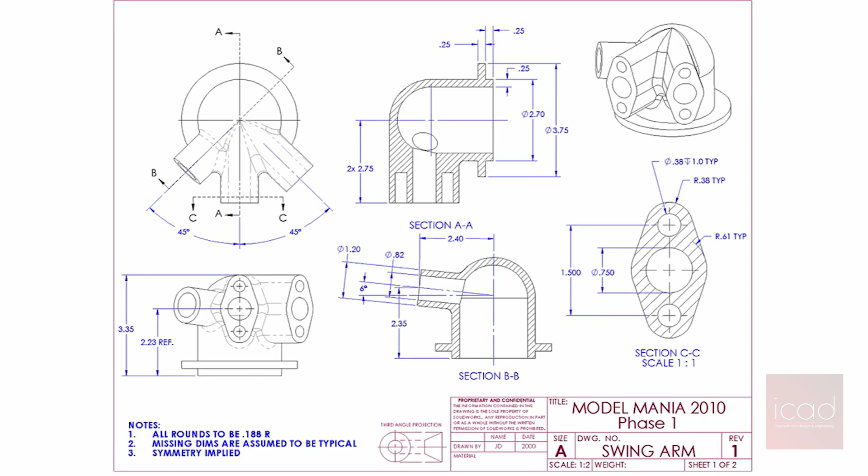In today's tutorial, we will be designing this drawing from Model Mania 2000. This is the phase 1 drawing of Model Mania 2000, held at SOLIDWORKS World 2000. This was the first ever Model Mania drawing, and it's been 25 years since Model Mania started. Model Mania is not just about time, it's also about accuracy. So it's not how fast you design, but how fast and accurately your design matches the given drawing. Let's get started.

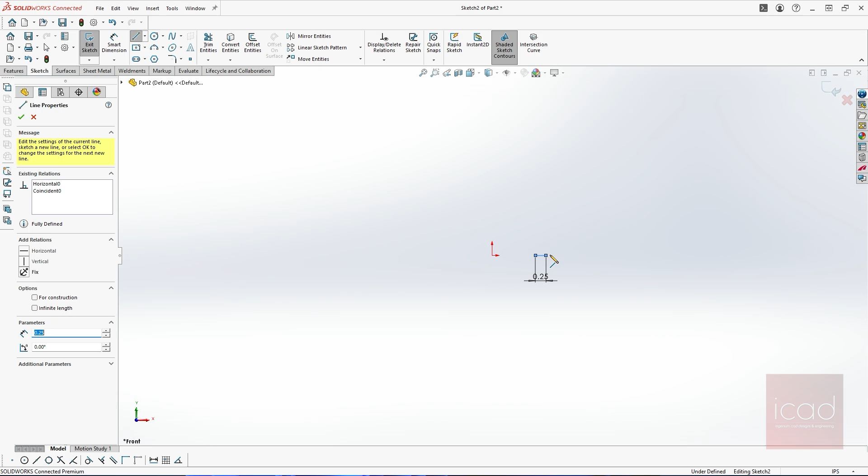For this particular drawing, first I'll take the front plane and sketch the dome part, which has to be revolved. Line, this is 0.25. I'm only giving dimensions of which I know, and the rest I'm just leaving, and I'll give the dimension later. 0.25, this is there.

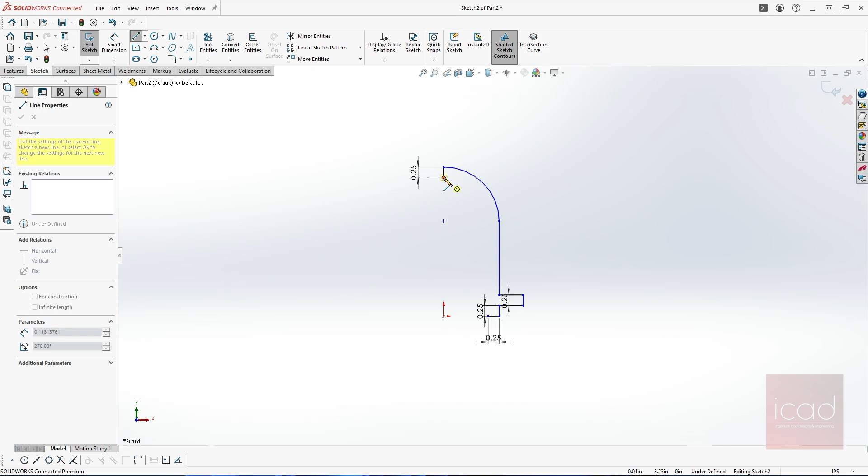It's just a line, and then we have a curve, so I'll just go back to the point. As you can see, there's a yellow circular thing, which means it just changed from line to curve. Again I'll do 0.25 because that's the thickness. Now you can see it's line, but if you go back to the point, you can see the circle, which means now it's not circle anymore, it's just line. And now it will go back to line again. That's how you change from line to arc when you're on a line.

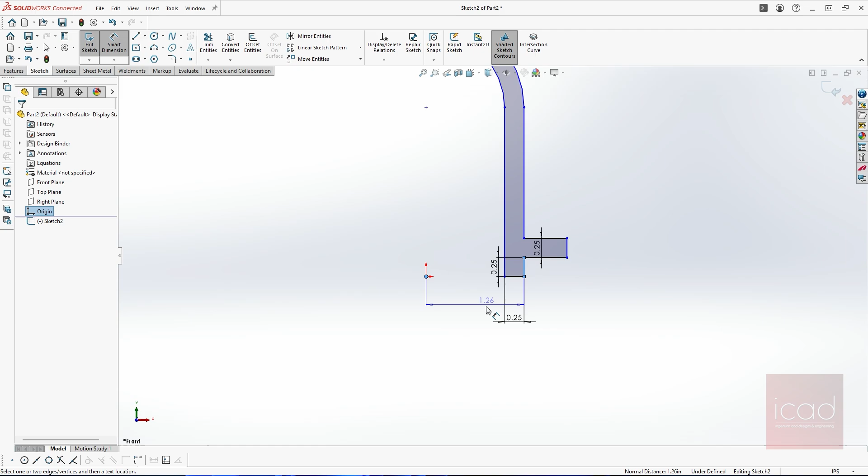I'll take dimensions. In the drawing, we know the outer diameter of this hollow cylindrical dome thing. So since we know the diameter is 2.7, the radius is that divided by 2.

Let's say you have a center line. I'll just take a center line. Right now you have a center line here. And instead of just giving radius, if you have a center line, what you can do is if you stay on one side of the center line, it will just show radius, but if you go to the other side, you can directly give the diameter. It's 2.7.

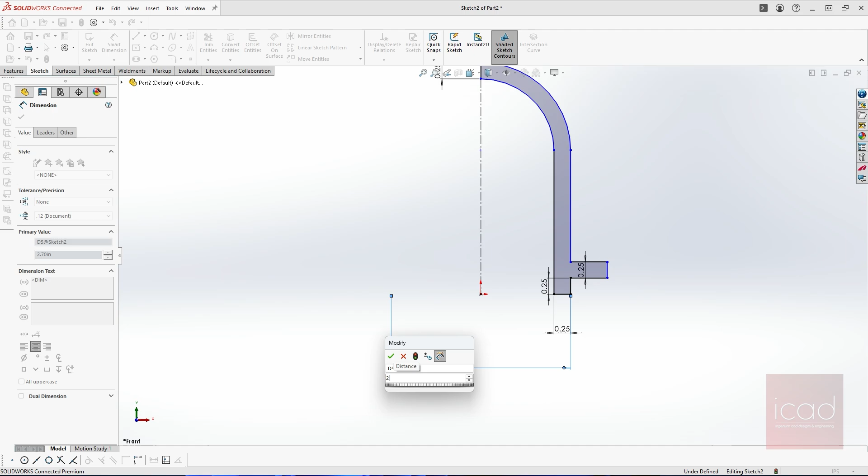We know the diameter of this, which is 3.75. And this line has to be collinear with this, because of uniform thickness, and the inner and outer arcs are concentric. They are already concentric, so we don't have to worry about that. And we know the dimension of this, which is 3.35 inch.

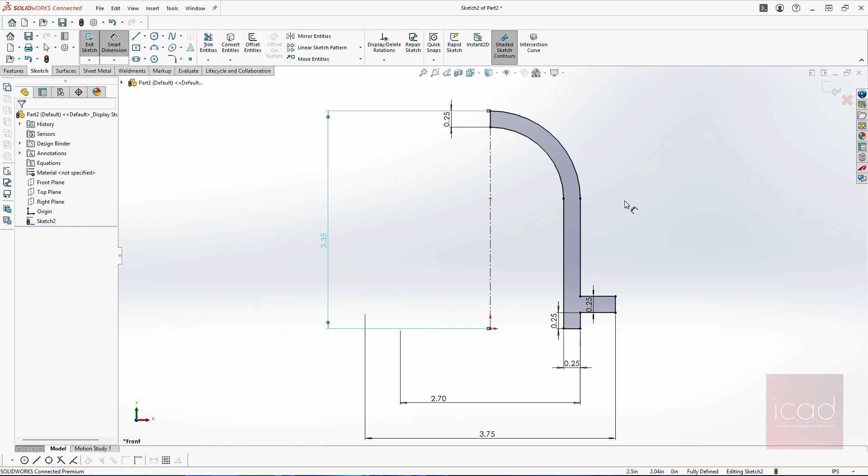Next I will revolve this, revolve base, and done.

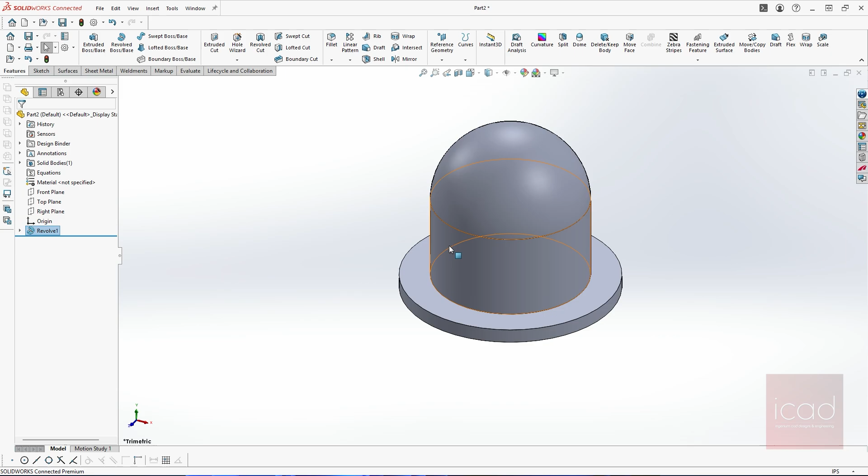The next thing is to design the section C thing, which is extruding from this. To design that, I will design it in the right plane.

I go to right plane, I will draw the center circle of diameter 0.75, and above that there is another circle of diameter 0.38. To make sure this is vertically aligned, and all of these are vertically aligned to the origin itself. The distance from the center distance is 0.75.

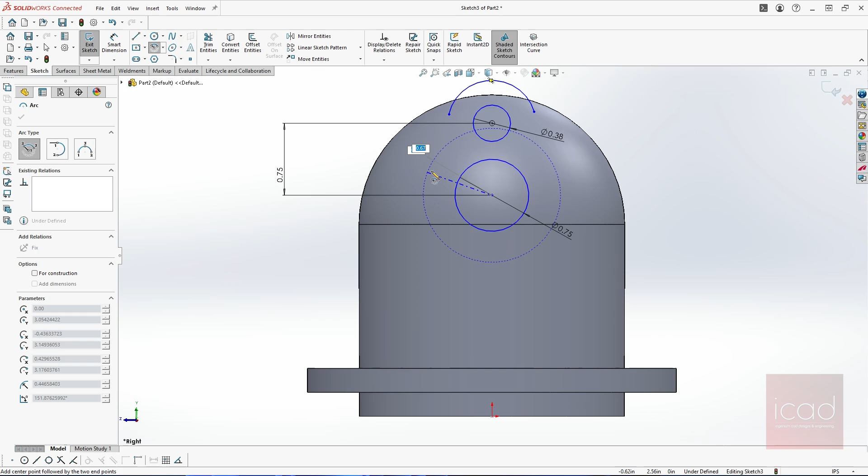Next we'll take arc, center arc, just draw this. Again I'll take center arc and draw. Next I will connect these two arcs with a line.

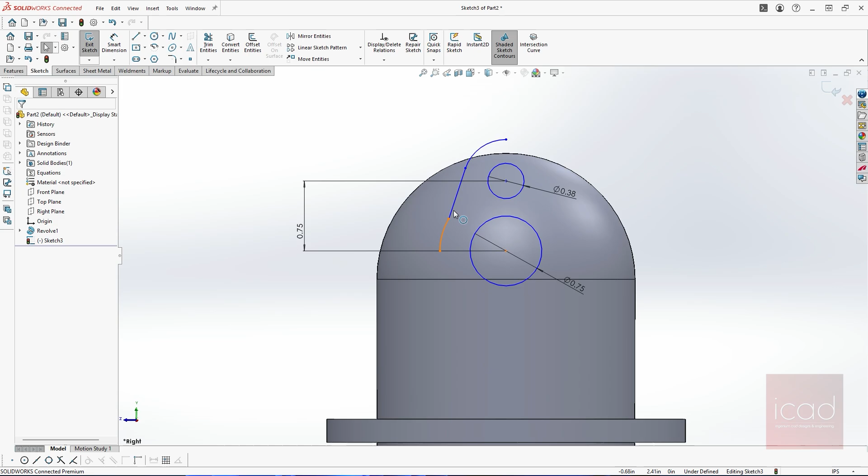Let's make sure it is again vertically aligned. Why am I doing this? Because I'm gonna mirror this later. Instead of creating the whole outer profile, what I'll do is I'll just create 1/4 of it. Since they are all symmetrical, I will just mirror them. Tangential. The radius of this arc is 0.38, and the radius of this arc is 0.61.

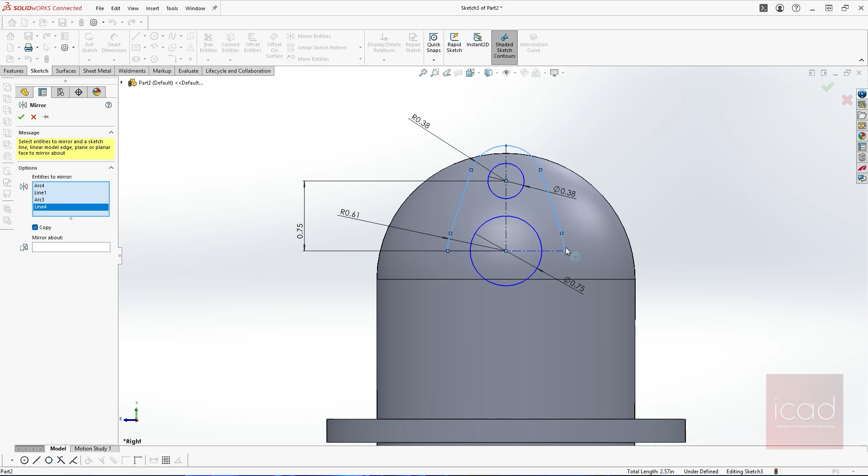I'll take line and check the for construction box, just draw a construction line so that I can mirror it. Go to mirror, select these things, and it should be mirrored with respect to the vertical line. Next again I'll take mirror, but now I'll select all these lines along with the circle, and it should be mirrored with respect to the horizontal line. The last dimension that we need to worry about: this particular arc should be tangential to this edge.

Okay, now we have it. You can trim the unnecessary lines, but I'll just leave it that.

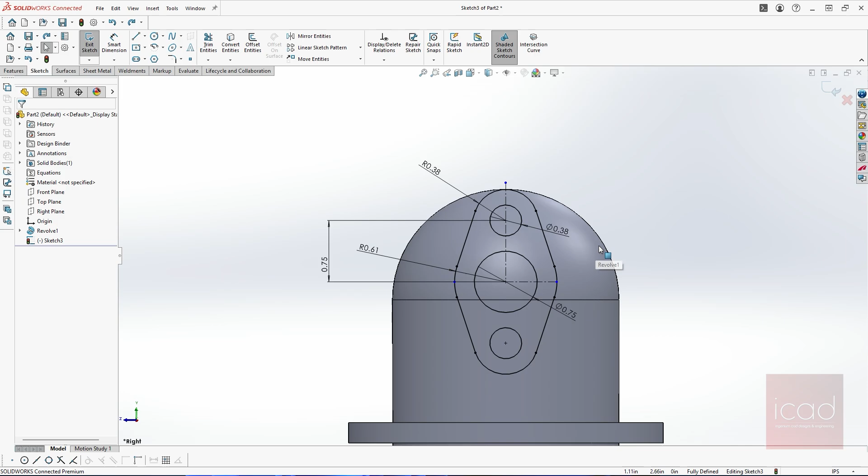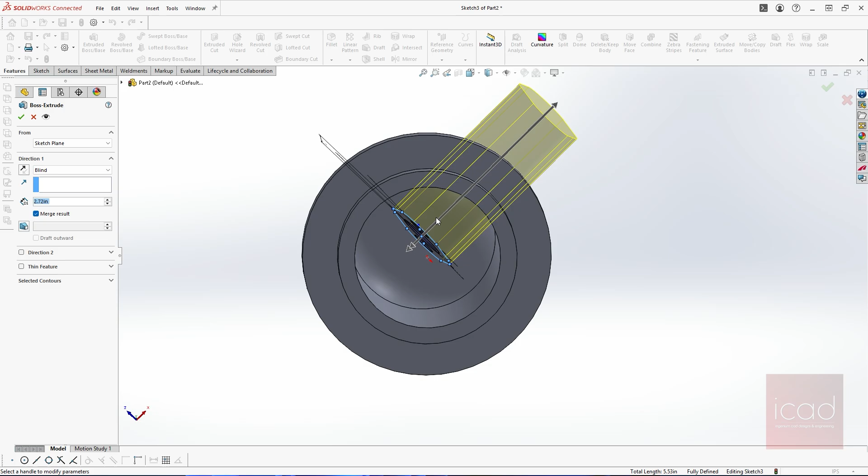Next we need to extrude it. Here's the trick: if you extrude it from the sketch plane, you'll have to remove the hollow region again, which we do not want. As you can see, if I extrude it like this, there is this thing we need to remove. So we cannot extrude it from this curved surface because it's cylindrical.

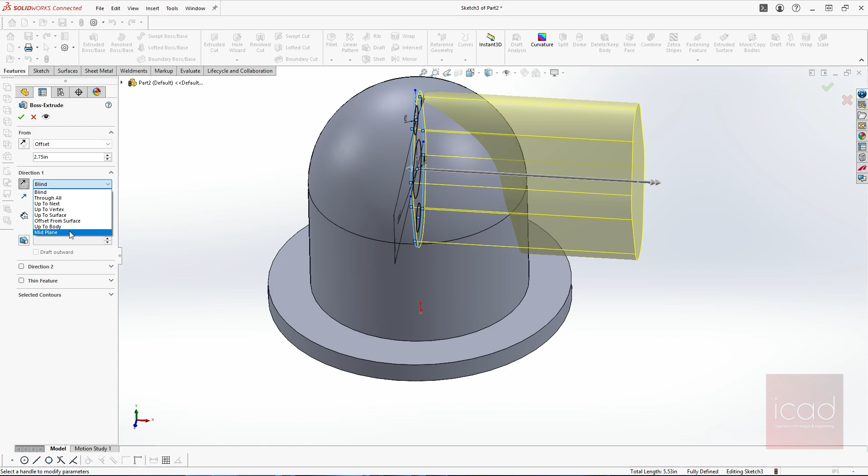Instead of extruding it from the sketch plane, I'll go to offset, and in offset I'll type 2.75, that's the extrusion we want, and I'll inverse the direction, and instead of blind I'll just give up to body. As you can see, I'm not extruding the holes at the moment. I'm only extruding the outer surface, because we need to provide the holes later, since this hole has to go through from one direction.

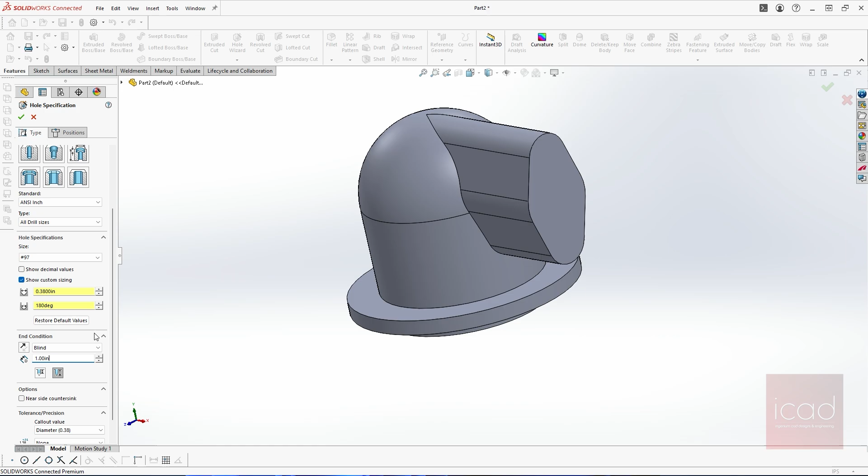Let's go to position, select it, should be concentric with the top arc. Second one should be concentric with the bottom arc. Done.

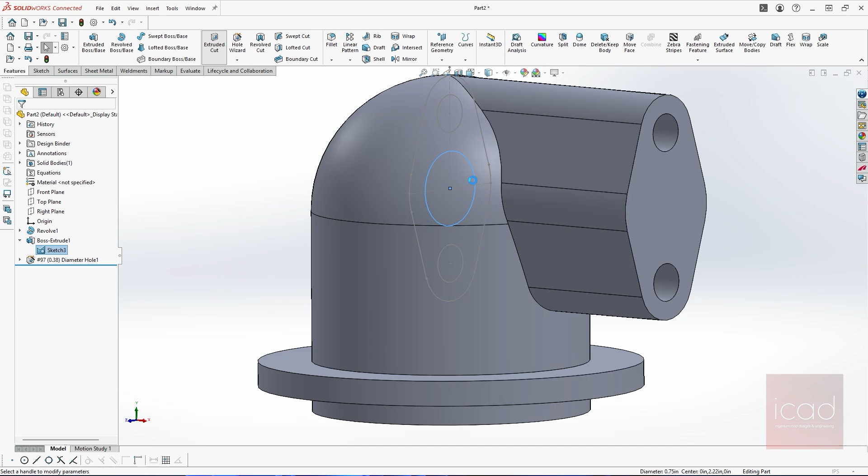Next we need to create a center hole. For that I won't create another sketch, I'll just take this sketch, and now select the sketch and go to cut extrude. Now only this particular region will be cut extruded. As you can see here, I'll just inverse the direction up to next, and done. Now we have a through hole.

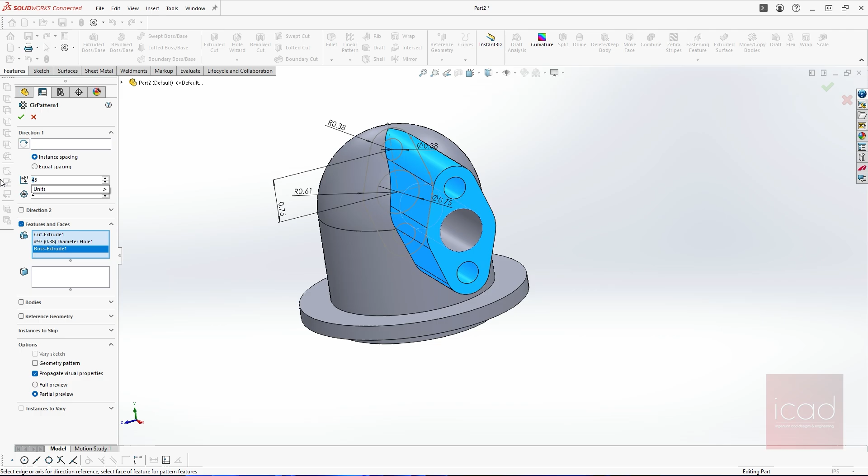Next we need to pattern it. Go to circular pattern, select the features - it's not just cut extrude, it's also the two holes and the boss extrude itself - and not equal spacing, we need another one at a 45-degree angle, and the axis is this. I'll just reverse the direction. Now I have another.

Now, as you can see here, the pattern feature will also pattern the hole, so you don't need to worry about creating another hole.

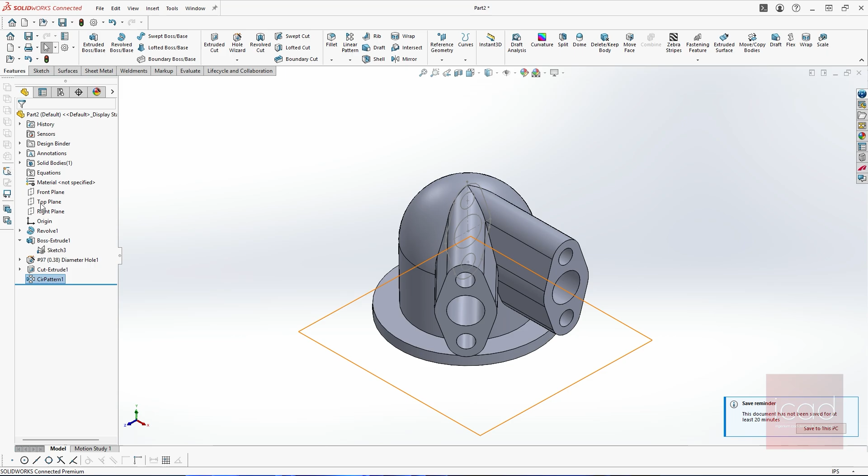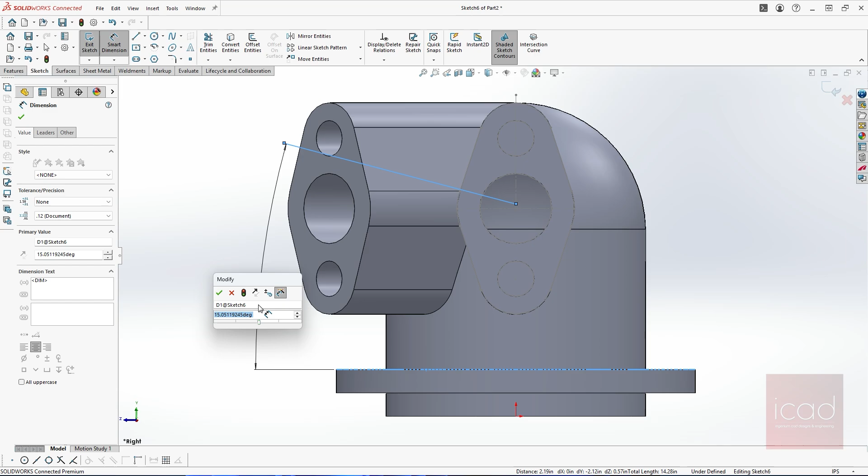I'll go to the right plane and draw the line. It is given that this line is at 6 degrees, so I'll select the line. I don't have a reference plane, so I can either select this or any other horizontal line. It should be at 6 degrees, and we know one more criteria: from the base the distance should be 2.35, and we also have a horizontal distance which is 2.4 inch.

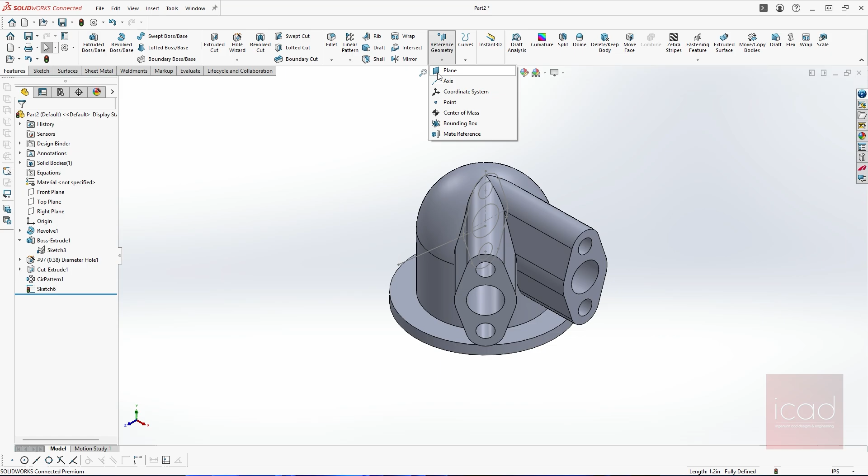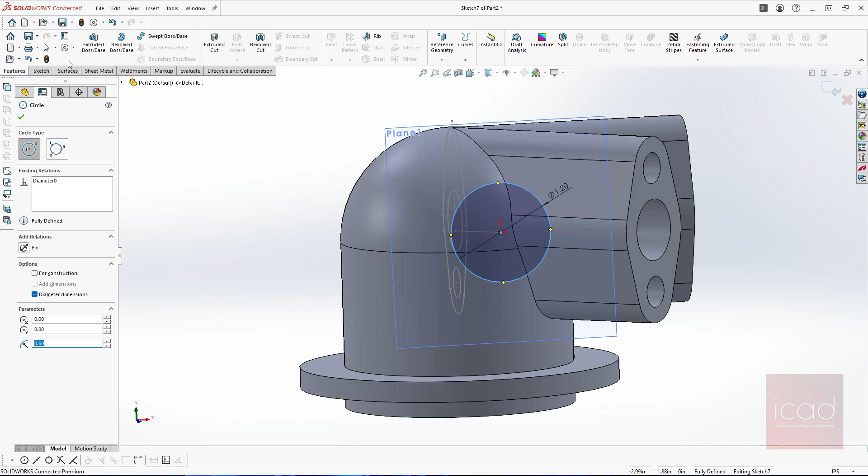Now what I'll do is go to reference plane and create a plane at this point, so this plane is now normal. Now I will draw the circle. The diameter of the outer circle is 1.2 inch, and I'll go to feature, extrude it up to the body - this body - and done.

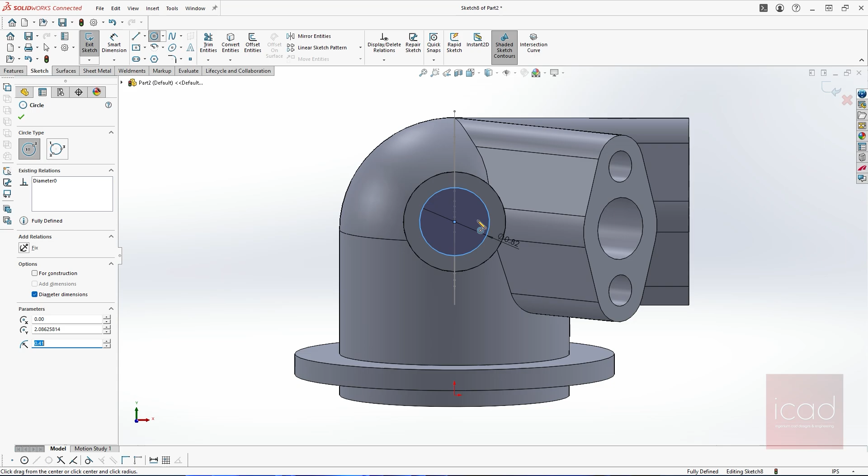Now we need a through hole, so I'll hide this plane now. Select this, take a circle, the diameter is 0.82. Feature, cut extrude, up to next, and voila.

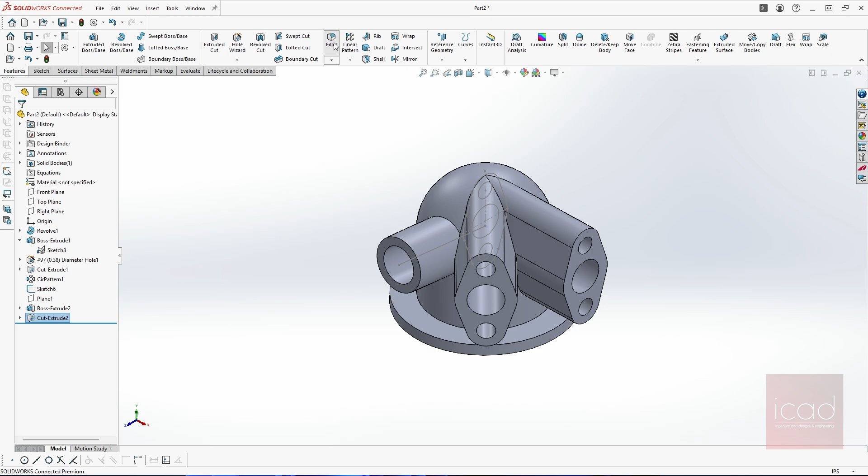Your design is practically done, but the thing is, in the drawing they have also given some fillets, but they have not given any dimension for the fillet. But if you check the notes, they have provided that all rounds should be 0.188 radius, which means all fillets have the same dimension of 0.188.

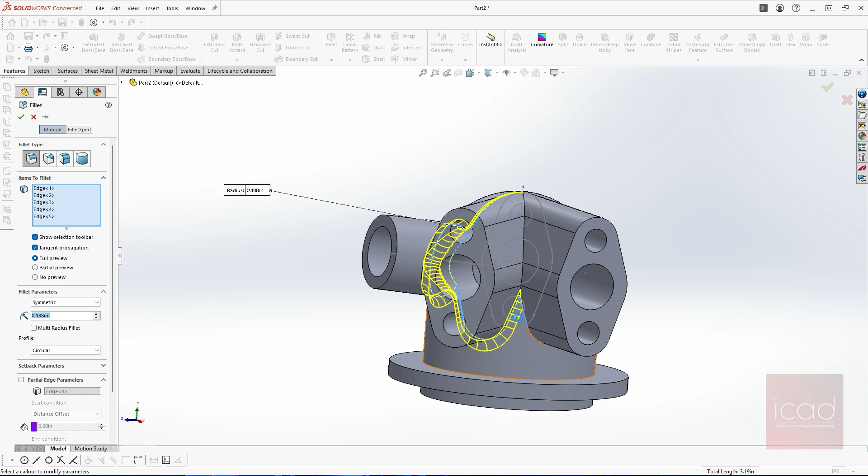So I will change the fillet to 0.188 and select all the corners. Make sure you have the tangent propagation set or checked in your fillet option. I shouldn't select the face, it should only be the edges. Alright, is that it? Yes, that's the fillet.

And now the fillet is done and your model is now ready.